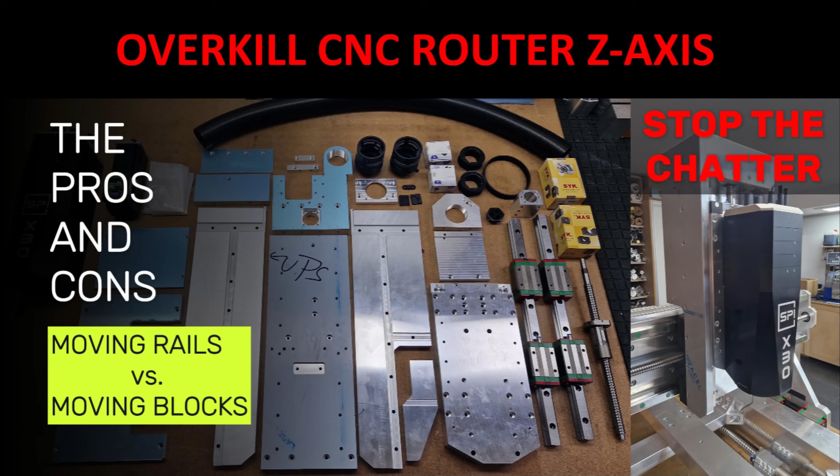Do you want to know the number one reason why your CNC router has chatter?

In this video, I will discuss the pros and cons of the two different Z-axis designs, either with moving rails or with moving blocks, and which influence this design has on chatter. I will also show the design and assembly of a very sturdy Z-axis, a proven concept on several of my builds, with a very clean look without visible cables, protected steppers, and an integrated greasing solution.

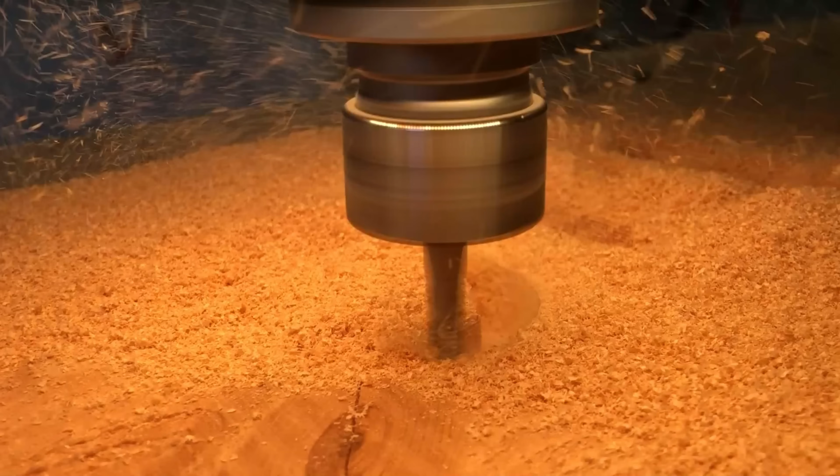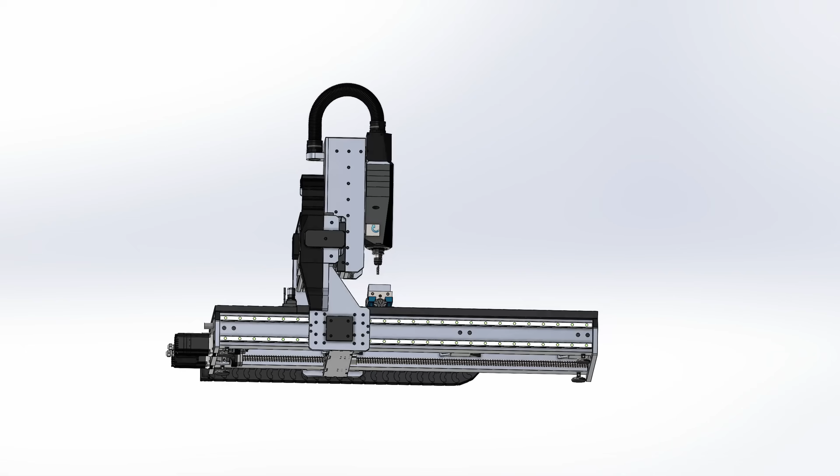Have you ever wondered why your end mill shrieks when you mill soft materials like wood? Well, there are many factors of influence like the chip load and the milling parameters, but the number one reason for chatter is the overall rigidity of your mill. When your machine is not stiff enough, you can play around with parameters and reduce chip load to cure it, but the underlying problem persists.

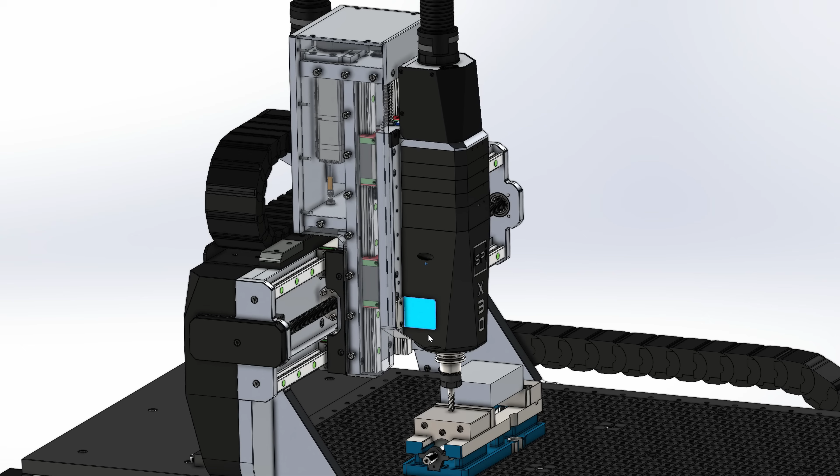And the key design element that determines the overall stiffness of your machine is the design of the Z-axis. There are two basic concepts, either with fixed linear blocks and moving rails, or with fixed rails and moving blocks.

With my current design, I try to be as rigid as possible, and as I have discussed in the last video, the lateral stiffness of the gantry is a key element. To achieve that, I have tried to keep the distance between the gantry bottom and the fixture plate as small as possible, in this case 160 millimeters.

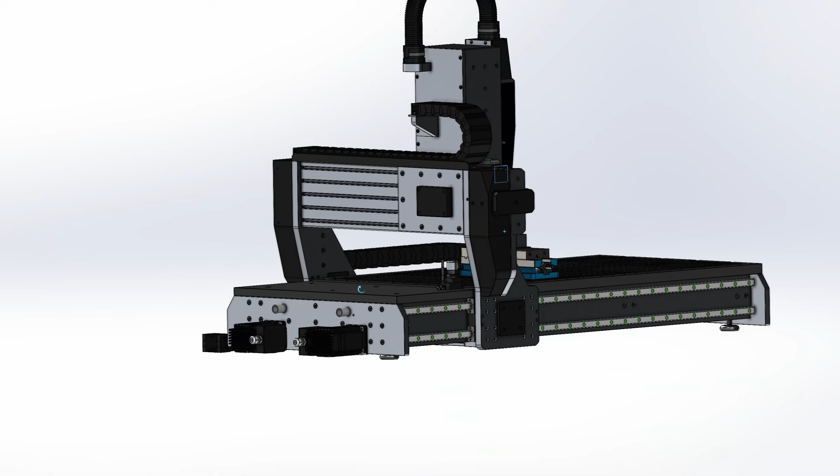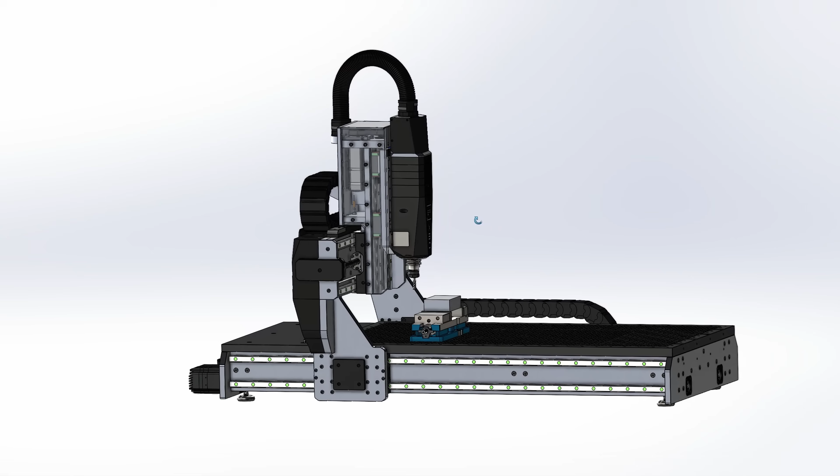This makes the gantry very rigid, but it requires a Z-axis design that makes the full gantry clearance usable work area, because 160 millimeters is not a lot of height. Here you can see a typical scenario of a 40 millimeter high part in a 4-inch vise and an end mill with a 40 millimeter stick out in a regular SK30 ER20 collet tool holder.

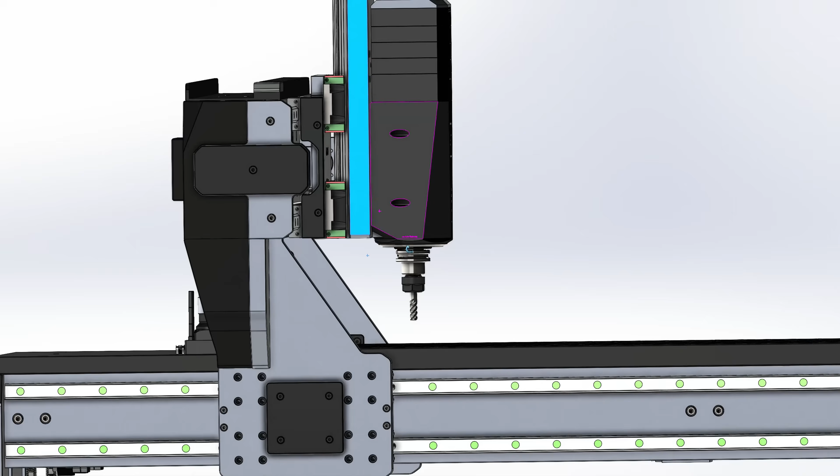The Z-axis here has fixed blocks and moving rails. The major benefit of such a design is that the spindle can move up high on the axis, well above the gantry bottom. This means that in Z0 safety height, there is no risk that the end mill can accidentally hit the workpiece.

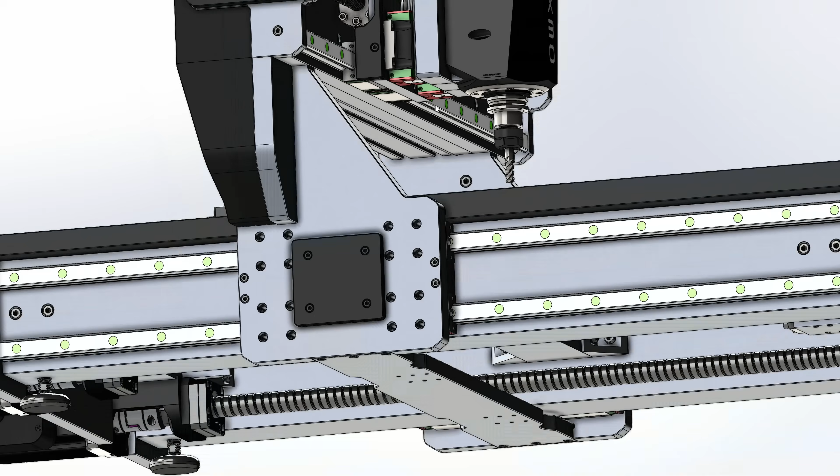If we look now at the same gantry design, but with a Z-axis with fixed blocks and moving rails, you can see that the upper position of the Z-axis is reached when the lower end of the rails are flush with the lower blocks, which in turn are usually flush with the gantry bottom. But as you can see, the usable area under the end mill is in this case just 40 millimeters.

So this is basically meaningless. You can cure this by moving the spindle up on the plate, but in case of an ATC setup, the plate could interfere with the magazine, and this also increases the risk of hitting work holding clamps. Alternatively, you can move up the position of the lower bearings.

The most common argument from people who have chosen this design is the advantageous dissipation of forces by the close proximity of the linear blocks on the gantry and the Z-axis. But the higher the blocks go, the less this argument counts.

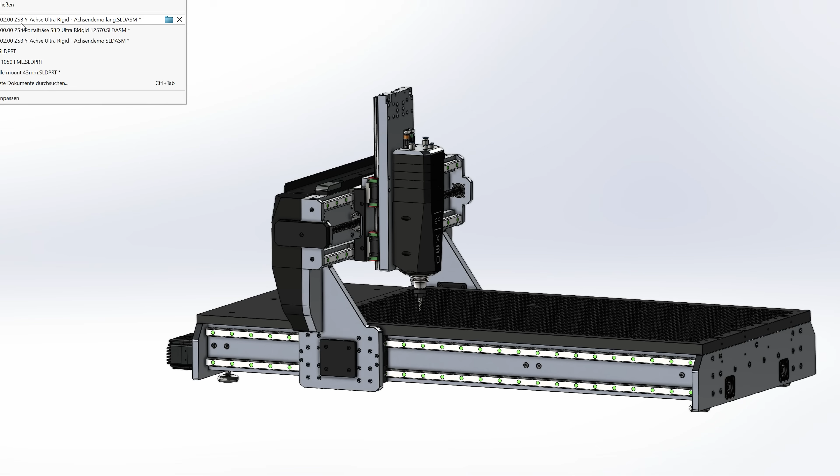So the usual fix of this problem is to increase the gantry height. However, this has a very negative effect on the rigidity of the whole machine. You can already see that this design cannot be as stiff as this design.

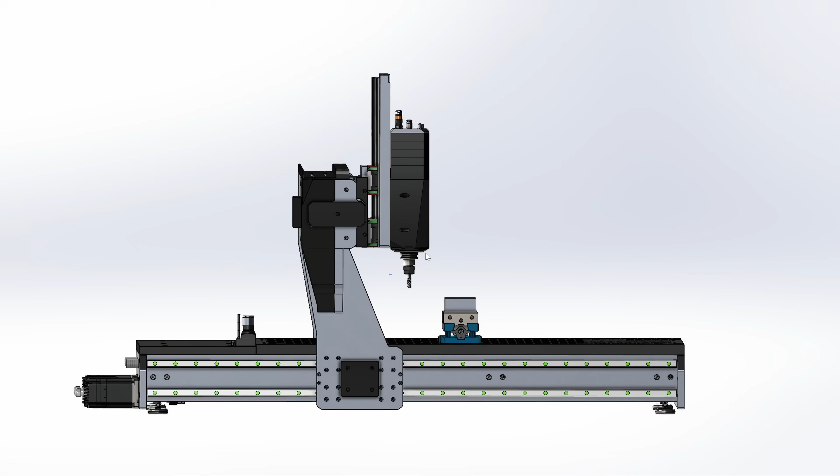And when we remember the formula for bending stiffness, the deflection under a given load is a function of the Young's modulus of the material, the cross-section, and the length. But the length goes in by the power of 3. So an increase of just 26% in length already doubles the deflection.

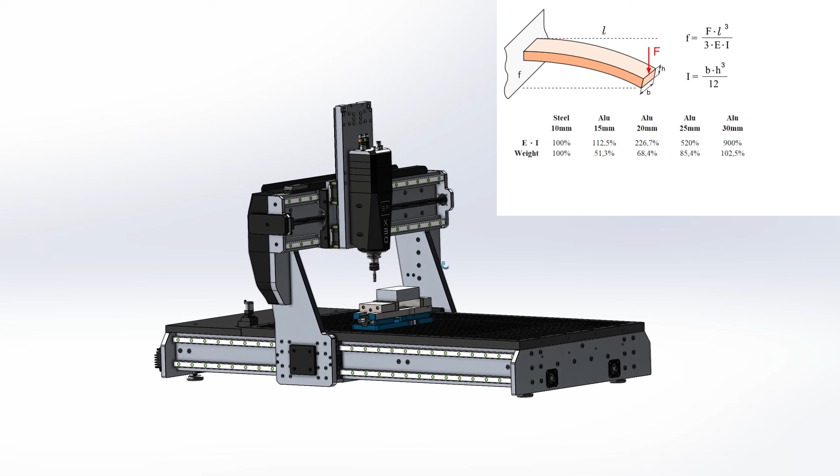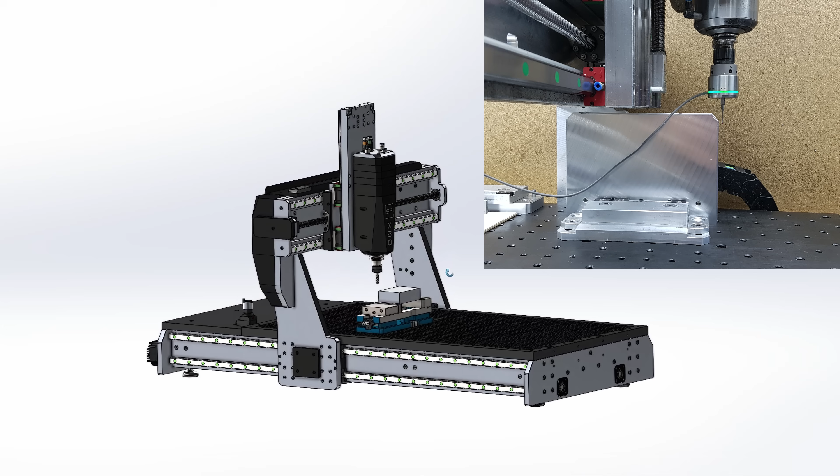In this case here, the gantry clearance, which is fairly similar to the unsupported length of the gantry side plates, would have to increase from 160 to 280 millimeters, and this would increase the deflection already by a factor of 5. And when you want to use a touch probe, you might have to increase the height even more. Here I touch off a part which is just 5 millimeters shorter than the gantry clearance without any issues.

Coming back to the design with the moving blocks and the main argument of the other design: yes, in the fully up position, the flow of forces is not ideal. But first of all, this is a position where usually no milling takes place, because it is the safety height. Secondly, it can be cured with a very robust and stiff design of the fixed plate that holds the rails. I'll show later during the assembly how those plates interlock to reduce bending to an absolute minimum.

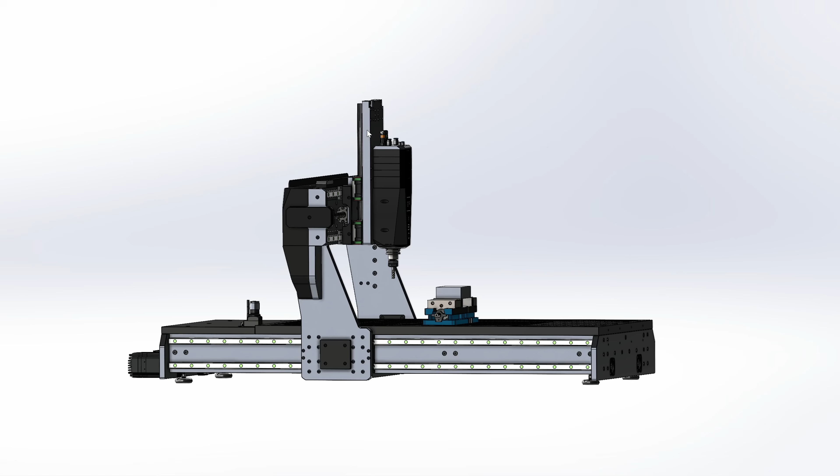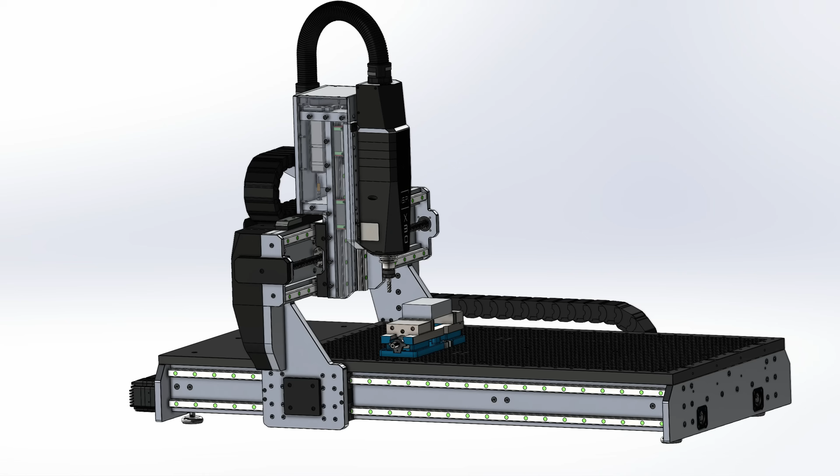On the other hand, when you mill flat stock directly on the fixture plate, the flow of forces is much better. In fact, it's even better than in the design with the moving rails, because here the lever is quite long - you have to lower the axis so much due to the increased height of the gantry. Another disadvantage of this design is that usually the stepper or servo is attached to the moving parts, meaning it not only has to lift the weight of the spindle, but also its own weight.

So all in all, for me and for this type of machine, a Z-axis with fixed rails and moving blocks is the better design. Let's have a look now at the assembly, but first a few impressions from the making of the parts.

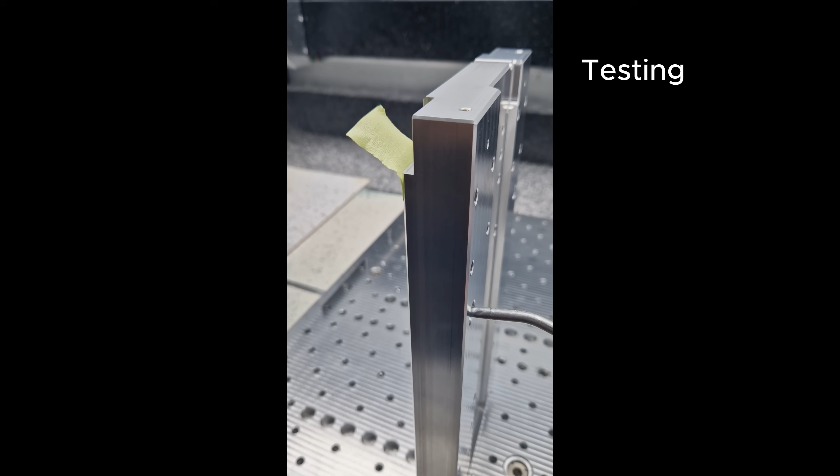As you can see, again an interesting concept for greasing the linear blocks from the front, due to the limited access of the grease nipples in the design and the enclosure.

These are the components that go into the Z-axis. From right to left: the linear components, timing belt, pulleys and taper bushings, tube and tube holders that I use as a drag chain substitute, the aluminum parts, the servo with integrated brake, and the star of the show - the 4 kilowatt Spindle X30 ATC spindle with a 4-pole motor, 30k RPM and an SK30 interface.

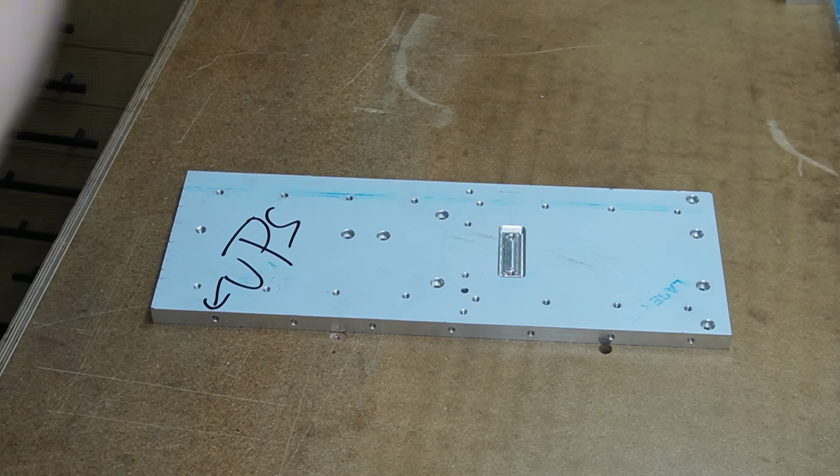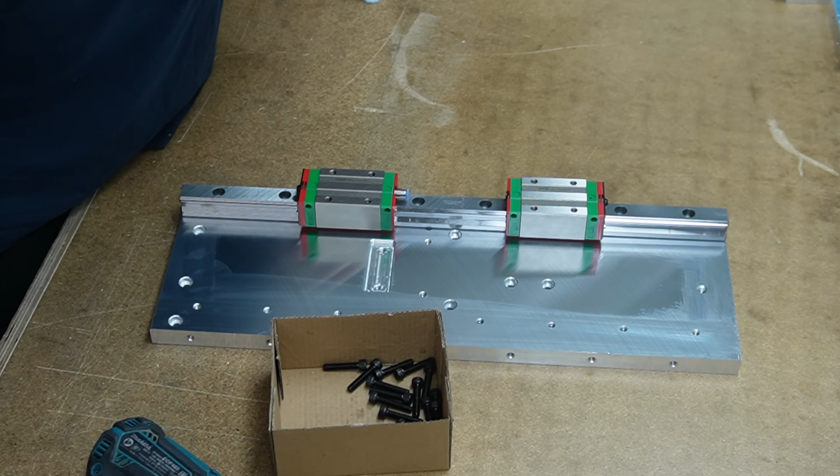The first step of the assembly is to mount the linear rails. I start with them first because now it is much easier to align them. I use gauge blocks, parallels and woodworking clamps to pre-align the rails to the outer edge of the plate. This pre-alignment is then reconfirmed and adjusted with a dial indicator. Once the first rail is aligned and perfectly parallel with the plate, the second rail is adjusted in reference to the first rail.

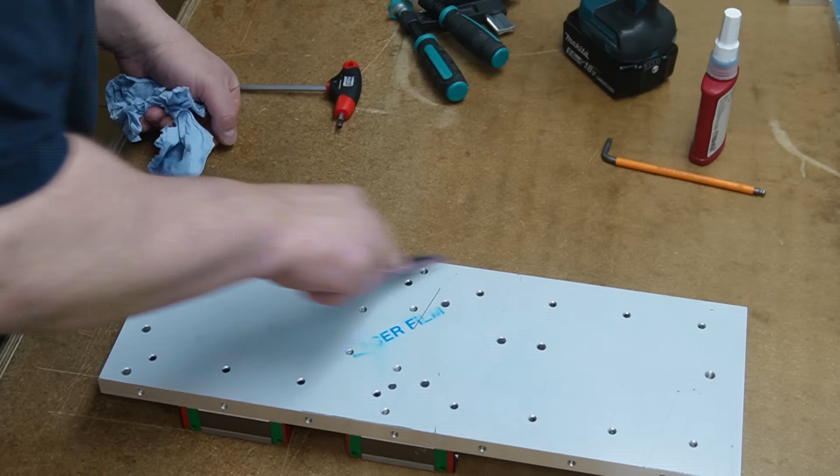Next up is the assembly of the side plates, top and bottom plate. They form a very sturdy column, which is the fixed part of the Z-axis and is bolted to the cross plate of the gantry. The side plates have 3 mm deep slots, and the other plates locate there with a very tight fit. With this type of design, the rigidity of the column is based not only on the strength of the force-locking connection of the screws, but also on the form-locking connection of the parts themselves.

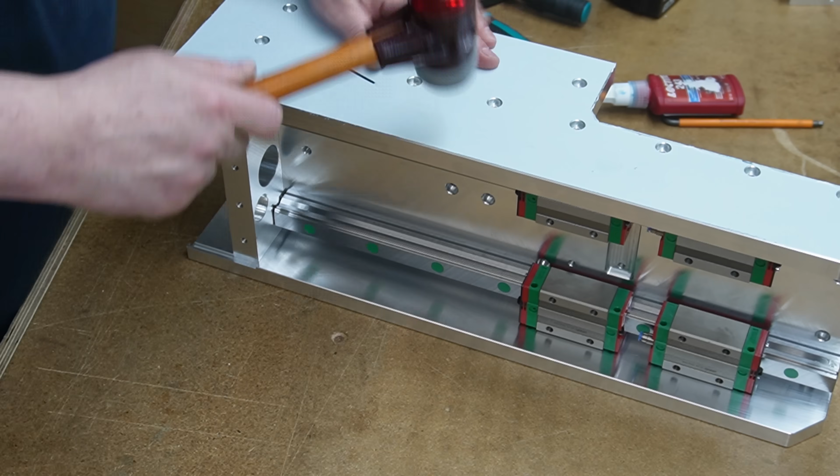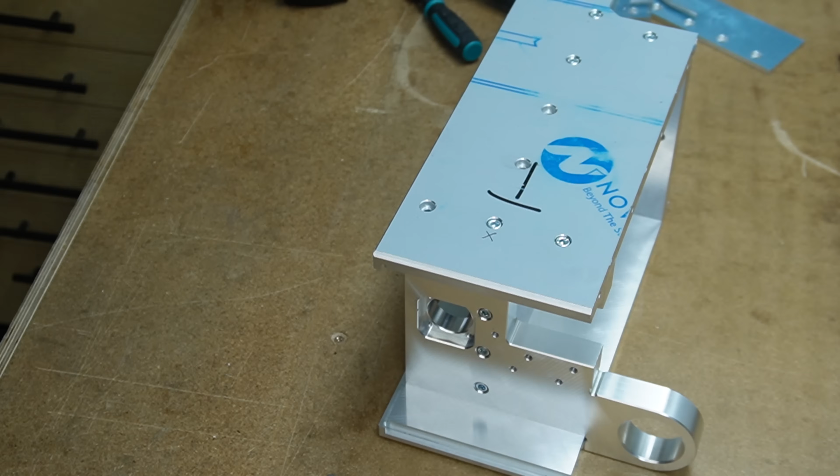Once all the plates are in place, they are connected with lots of M6 bolts, which I torque up to 12 Nm, which is a hair above the recommended torque for 8.8 bolts. I don't use higher grade bolts for this type of connection because the mating thread is in 5083 aluminum, which simply doesn't have the required tensile strength for the torque of 12.9 bolts.

After this, I could assemble the ball screw. I use a 16 mm TBI 1605 screw with a zero-backlash double nut and 5 mm pitch on this axis. I first add the custom-made nut housing, and then prepare the floating end with the bearing and the circlip.

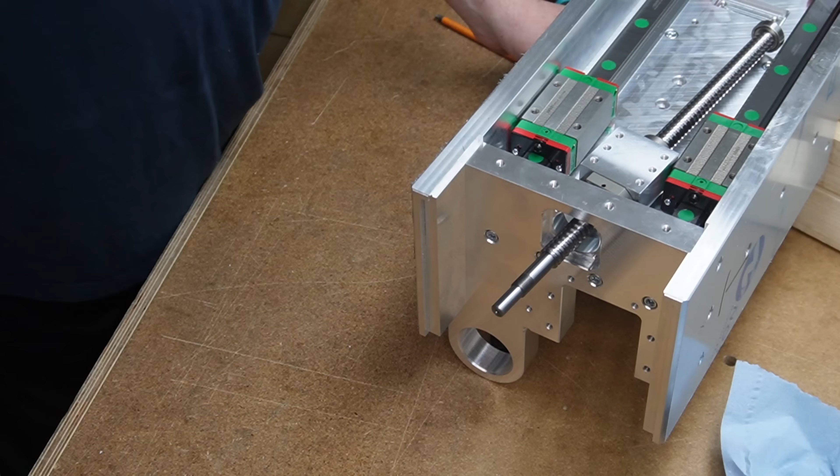Then I mount the fixed bearing block. This is an FK12 block from SYK. These are really high quality blocks with angular contact bearings from NSK inside.

Just the other day I saw a reel from a guy teaching on Insta how to fit these bearings, but in fact he taught everyone how not to do it. Folks, do not fine-tune the torque to rotate of these bearing blocks with the lock nut. The purpose of the lock nut is to lock, meaning secure the bearing block with the ball screw.

Angular contact bearings can be oriented in two different ways, a so-called X orientation or a so-called O orientation. In X orientation, the inner rings have contact and the preload of the bearing pair is adjusted with the outer rings. In O orientation, it is the other way around.

So when you tighten the lock nut and the friction and torque to rotate of the bearing block increases during this process, you have low quality bearing blocks, either with angular contact bearings in O orientation, which is wrong for this type of application, or worse, blocks with simple deep groove ball bearings, which cannot absorb axial loads and cause severe backlash in your axis.

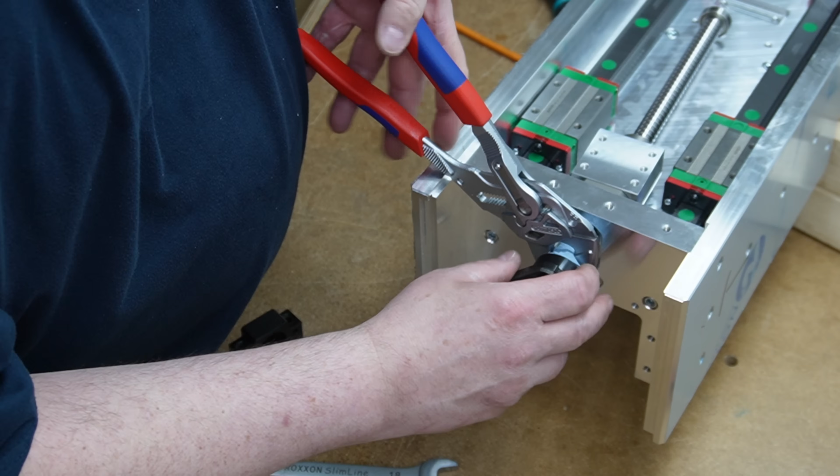As you can see here, I apply as much torque to the lock nut as I can, using a wrench and a pair of pliers with smooth jaws in order not to mar the screw. But after this, it rotates as freely as it did before, which is a sign for an X orientation and a good quality bearing block.

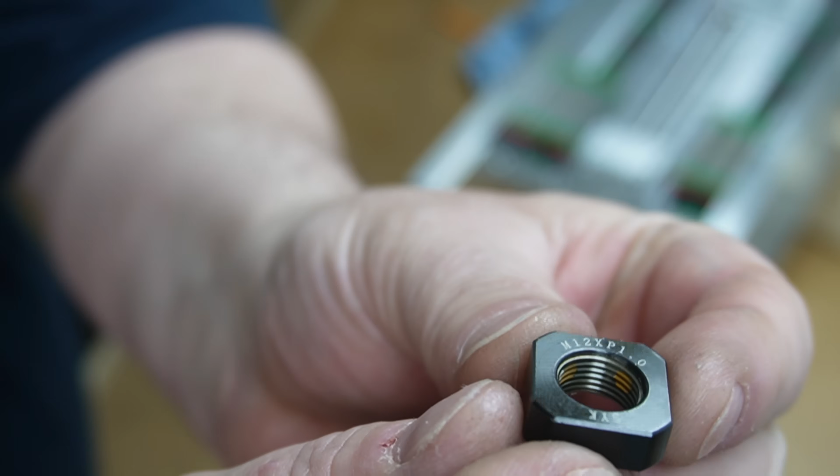Good quality lock nuts have two inserts out of brass and the thread is cut through these inserts, so the grub screws do not push directly on the thread of the ball screw and cause damage, but push the inserts on the screw and therefore secure the lock nut in place.

And do not make the mistake of gluing the grub screws in place. You will not be able to remove them in case you have to disassemble the ball screw. A tiny amount of medium strength Loctite is more than enough to secure them.

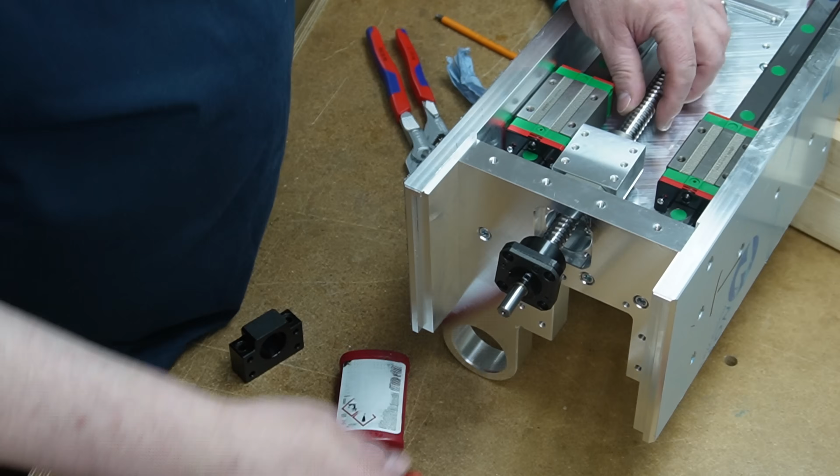The recommended torque to fix these grub screws is 2 Newton meter, but since my torque wrench starts only at 2.5, I do this by hand and feel.

After the ball screw is fixed, it was time to mount the spindle plate. Before that, I loosen again the bolts of the floating bearing block, because this will be adjusted later in the process. I set the correct spacing of the plate with a feeler gauge and bolt it to the linear blocks.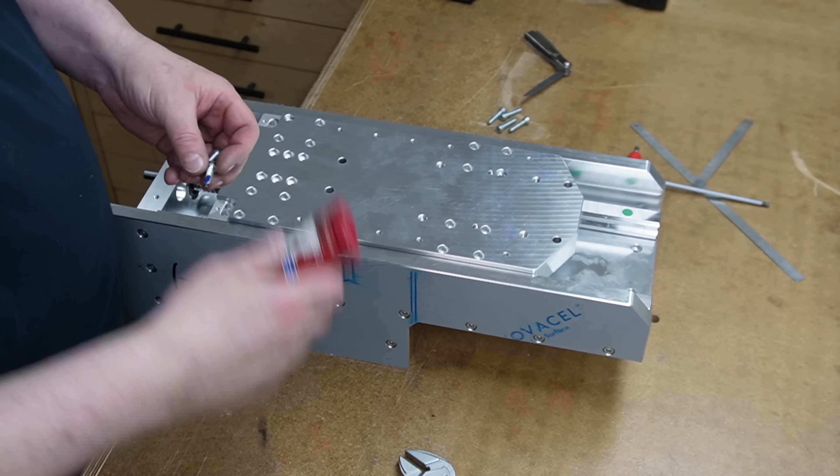Then I fix the ball screw nut housing to the nut and the plate in the uppermost position, where I can still access the bolts with an Allen key.

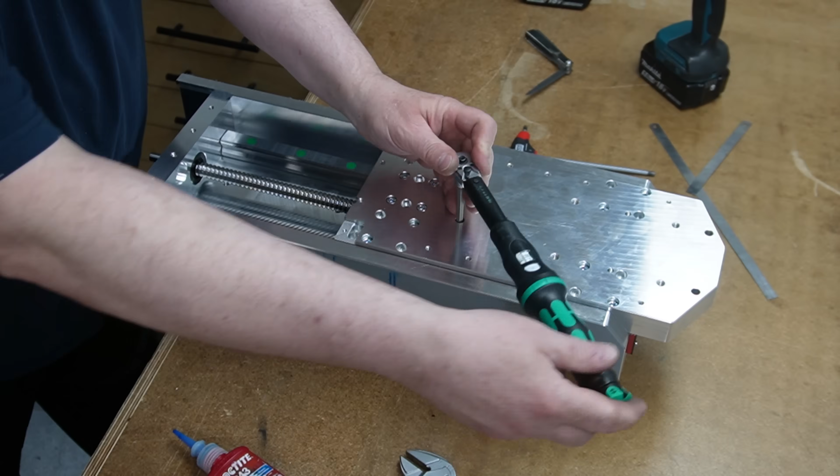After this, I move the plate to the lower position and fix the floating bearing through 2 holes in the plate. This ensures the correct alignment of the ball screw parallel to the linear rails.

And finally, the bolts between the ball screw nut and nut housing are secured and torqued one by one in order not to lose the alignment.

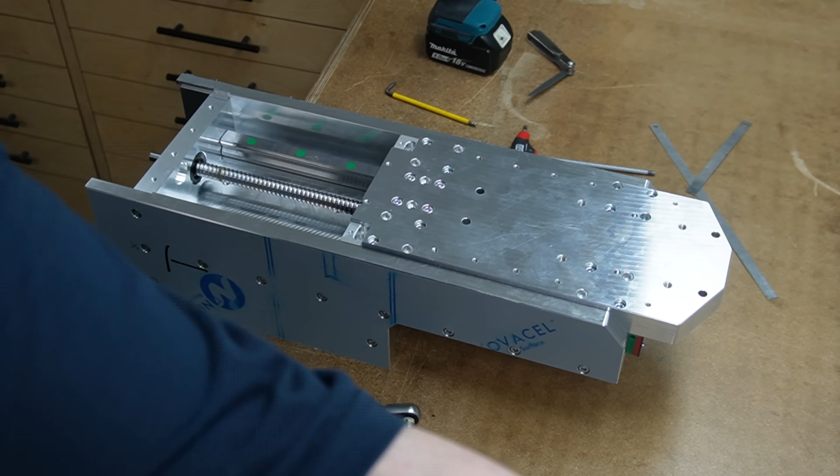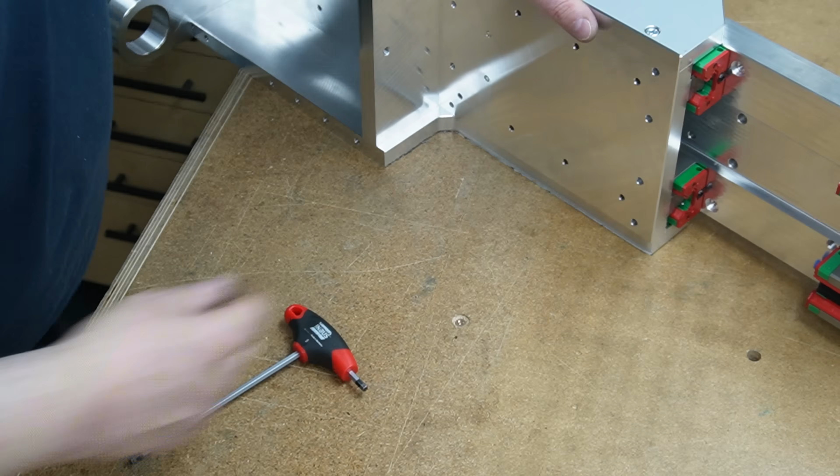After this, I remove the plate with the already mounted linear blocks again and take care of the grease concept. As you can see, there is no good access to the blocks because they are hidden by the side plates. And because of the limited access in the enclosure, I wanted to grease everything from the front.

That's why I drilled the 2 100mm deep holes in the top, which you have seen earlier. They end in the M5 thread of two push-in fittings, which are connected with 4mm pneumatic tube to the lower bearing blocks.

The upper linear blocks are greased through the plate directly in the grease opening in the top. And finally, the plate is pushed back in place and the remaining bolts and fittings are added.

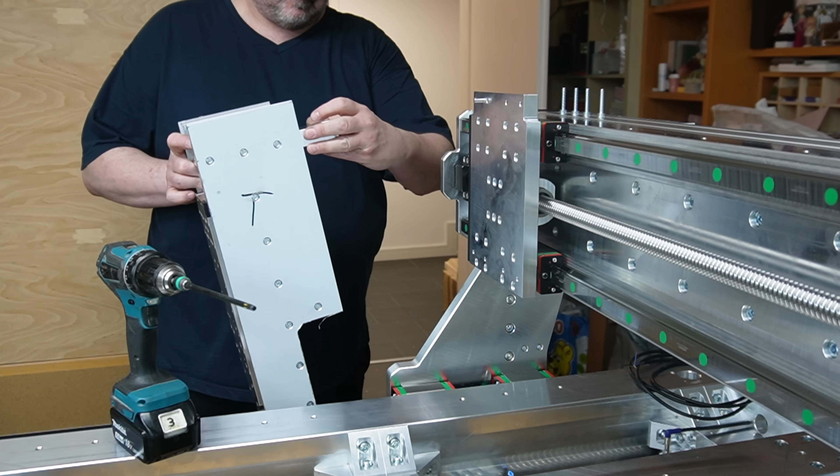And then it was time to mount the Z-axis to the gantry. I have two reamed 6mm holes in the design, one in the cross plate and one in the axis itself. A dowel pin acts as a pivot point, which makes the tramming of the axis much easier.

Everything is loosely fitted because the final tramming will happen later on. First, I add the inductive homing switches and the motor with belt and pulleys.

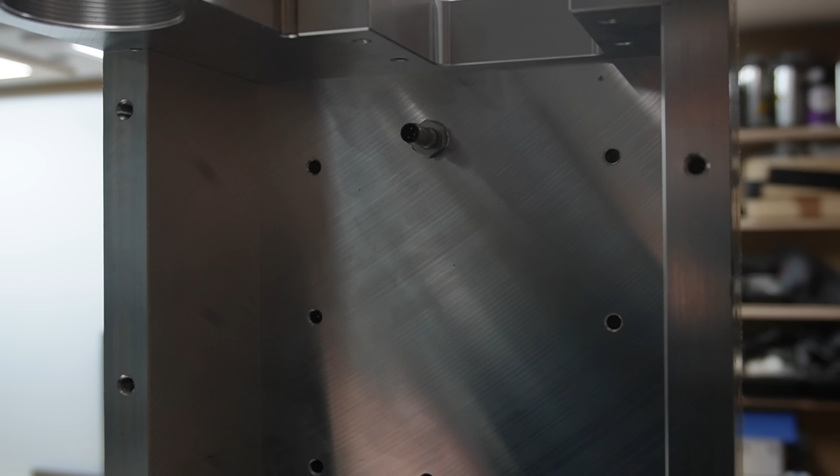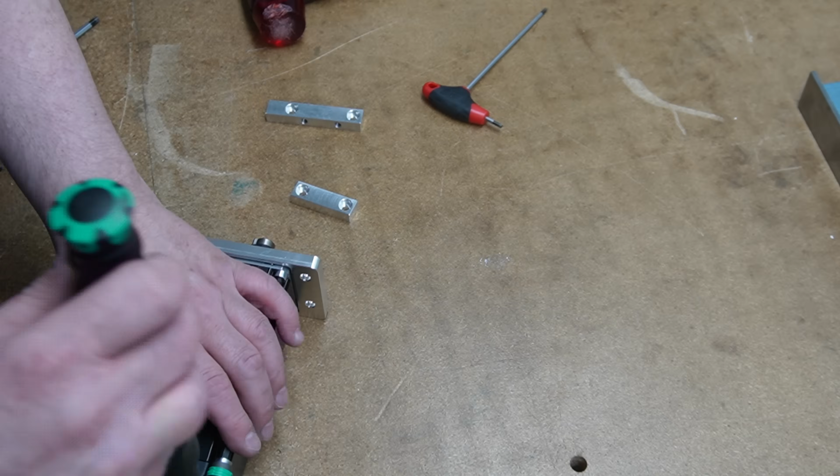The servo has an integrated brake because servos run free when they have no power. So in the event of an e-stop or a regular shutdown of the system, the brake prevents the Z-axis from dropping under its own weight.

I add two small brackets next to the motor mount, which I use to adjust the timing belt tension. This is simply done with two M6 grub screws that push against the motor mount. The taper lock bushings are fixed with two grub screws to the pulleys. They need to be tightened step by step and finally locked with the correct torque, again step by step.

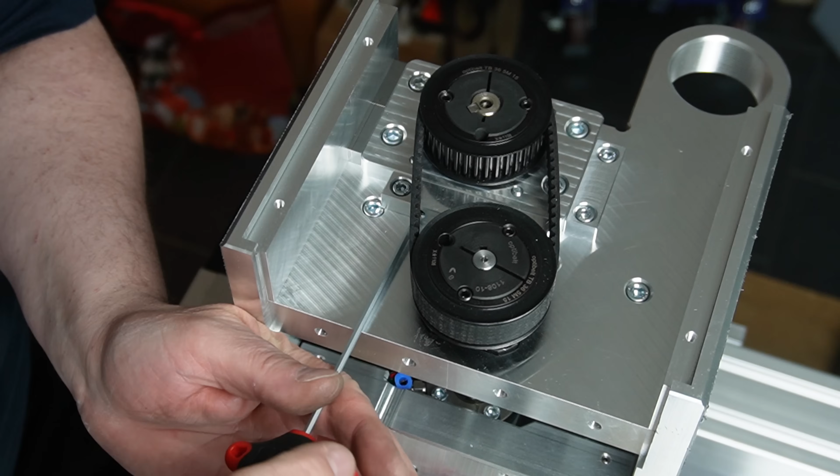And here you can see how I adjust the belt tension. Once this is properly set, the motor mount is bolted tight.

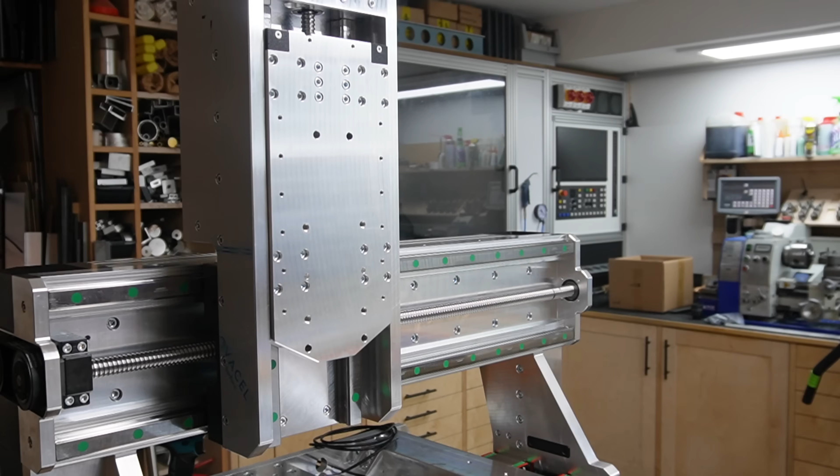An important step at this time was to confirm and adjust the tram of the axis. This is not the tram of the spindle, that will be done later. Here it is important that the Z axis moves up and down perfectly perpendicular to the X and Y axis, so this has to be done in two directions.

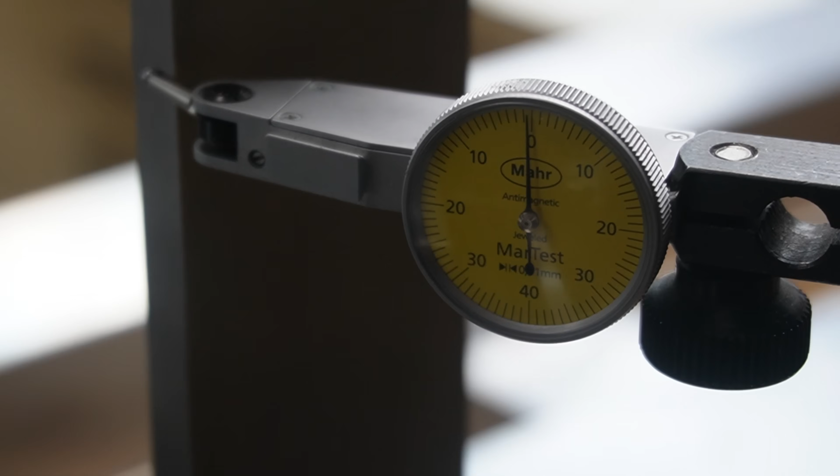And I believe the final results are not too shabby for a DIY hobby woodworking router.

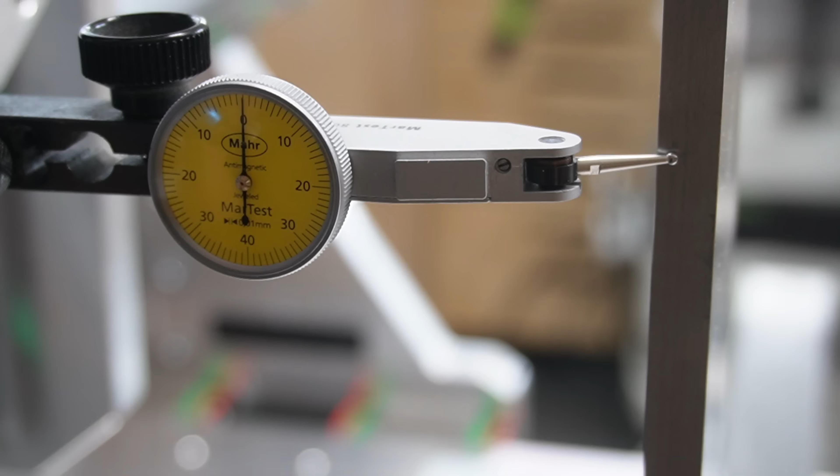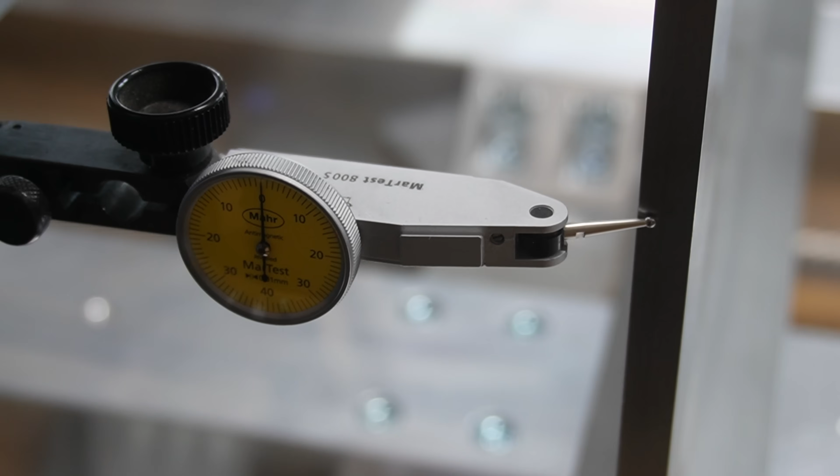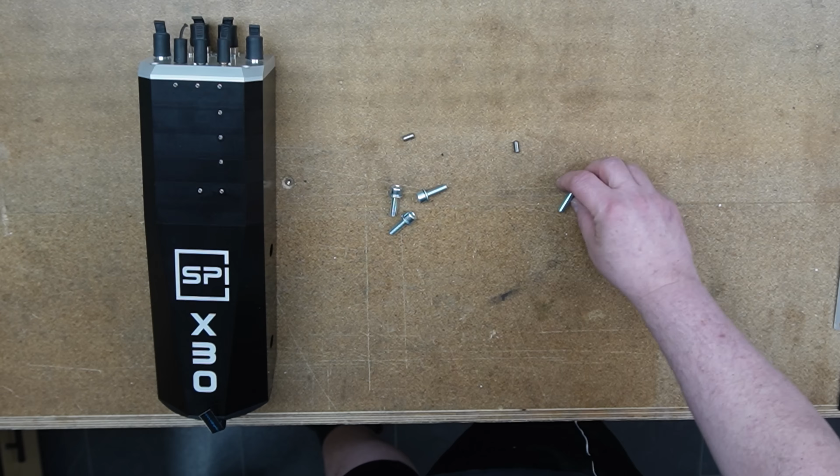The business end of the axis is a 4 kW SPI X3080C spindle. SPI spindles come in a rectangular form factor and do not require an additional mounting bracket. They can be either mounted from the back into 4 M8 threads in their own housing, or from the front through 4 openings with a special rounded Allen key.

For this mounting method, they come with a special fastener kit, which is basically a washer fixed with an O-ring to a bolt. They also have 2 reamed 6mm holes for dowel pins for additional shear strength in the connection. However, I will use only one of them as a tramming pivot and secure the spindle additionally with the 2 lower M8 bolts from the back.

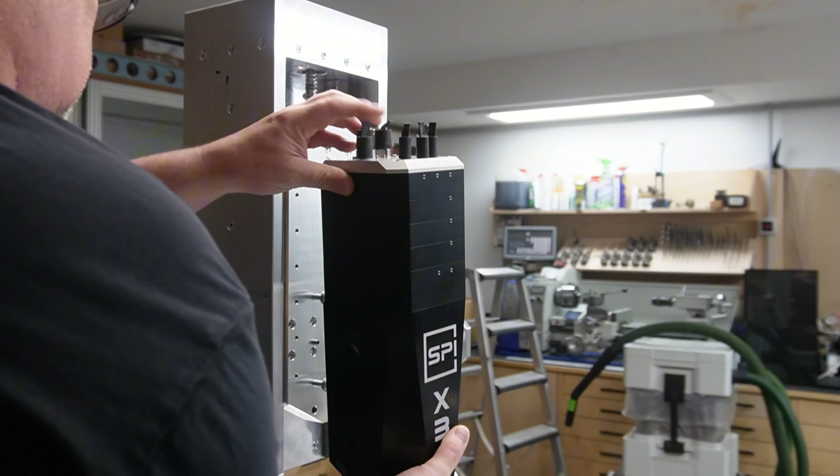And with this system, the mounting is actually quite easy. What helps as well is the fact that the spindle has an aluminum housing and weighs only 13 kg, so the whole process can be easily managed by one person. You just slide it over the bolt and washer combo and tighten the bolt in an iterative pattern, pushing the spindle as well over the dowel pin until it sits flush with the mounting plate.

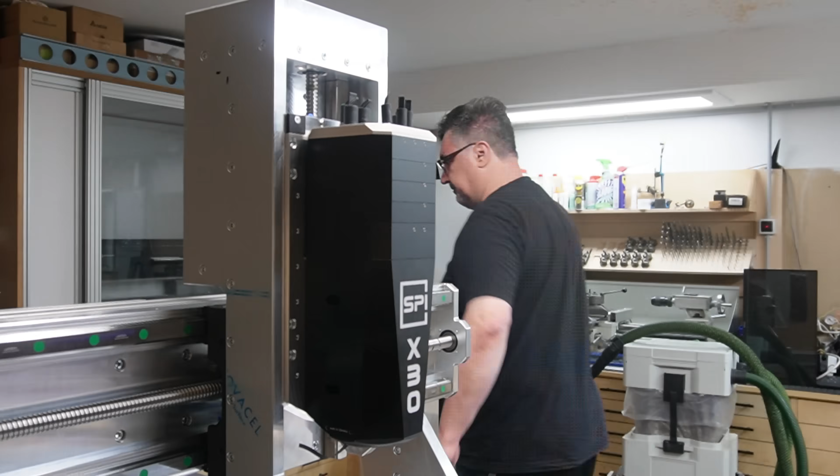Last part to complete the axis is the tube, which acts as a drag chain and connects all the cables and air lines from the moving to the fixed part of the axis. This tube is from Igus and is designed for cable management on robots. The major difference to a regular drag chain is that it can be mounted in a 3-dimensional way.

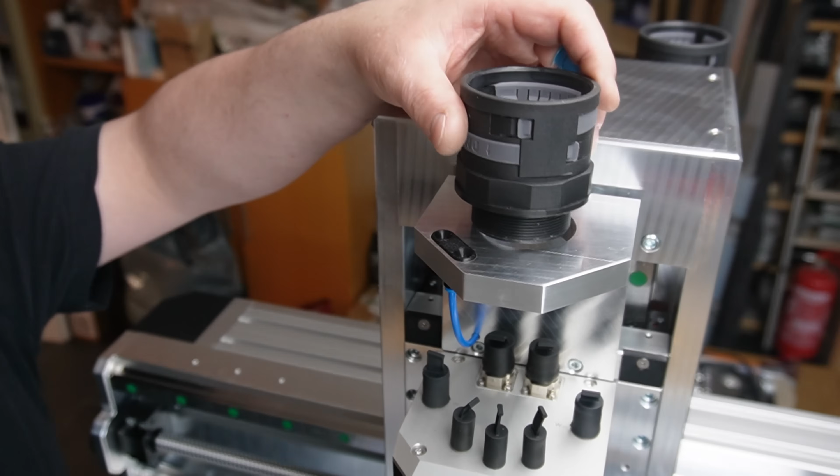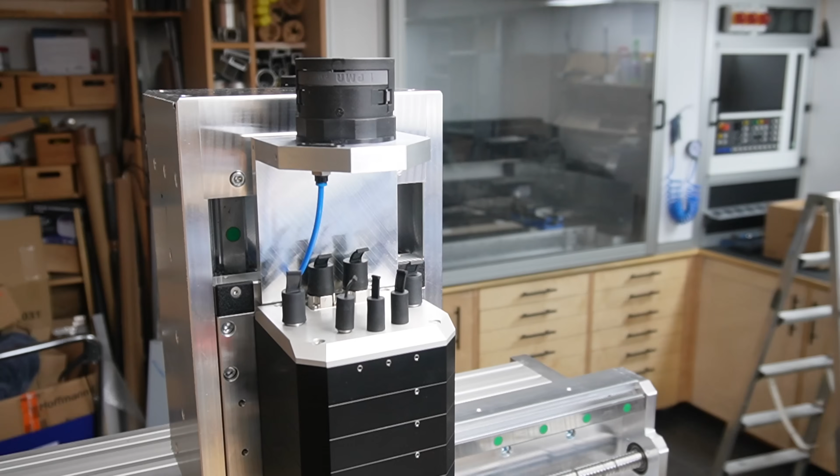But when the Z-axis chain ends in the middle and the gantry chain starts in the middle, the cables, and especially the water cooling and air tubes, have basically no radius to go from one to the other. With this design, this is in fact no problem.

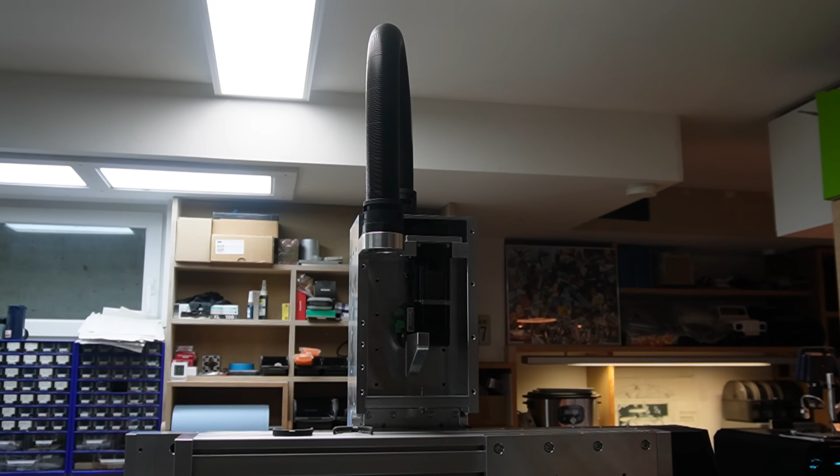In addition, the bracket which holds the tube on the moving part has as well a fitting for greasing the ball screw nut, which is completely blocked by other components. Servo and belt drive are then protected from dust with the backplate, and the cables are routed through the back in a special seal from Lapp.

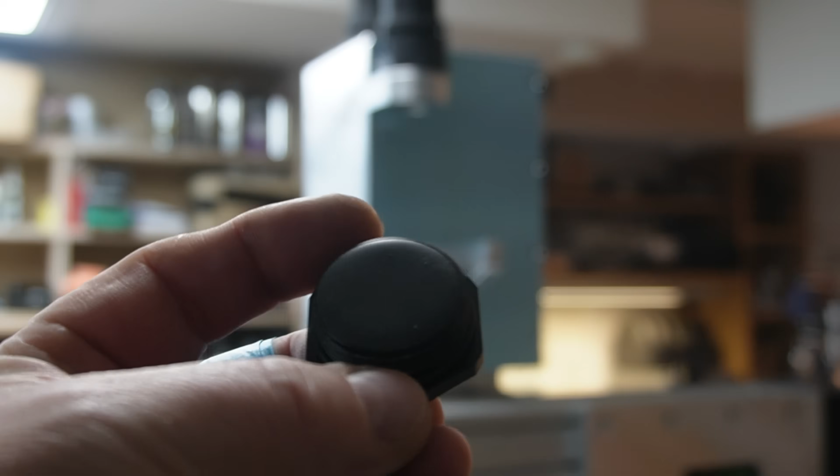And with this, the Z-axis and the mechanical part of my new DIY CNC router is finished. Let me know in the comments below what you think about this design and whether you like it or not. In the next video, I will route all the cables from the machine through the drag chains and move everything into its final location, which will not be so easy because the current weight is already well above 300 kg.